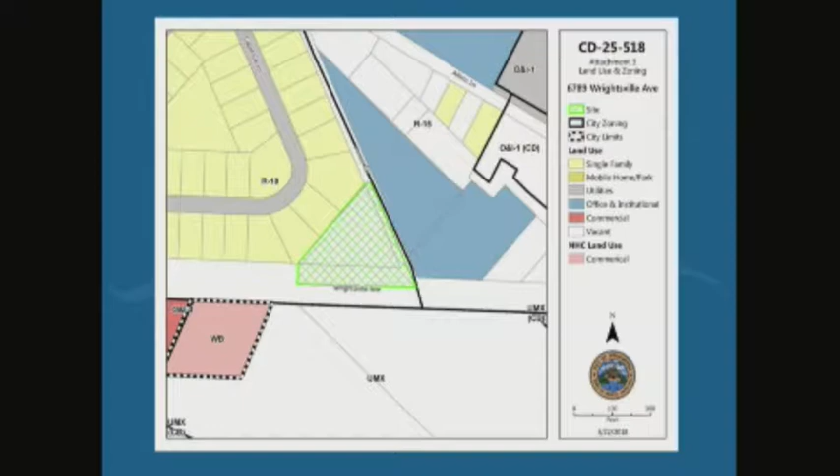To the west and northwest, the property is zoned R10 Residential District and occupied by single-family residences. To the north and northeast is zoned R15 Residential District that is currently occupied by a religious institution. South of the subject property is zoned UMX. On this slide here, you can see the site and the roadways that intersect with the property. Jones Road is an existing unimproved city-maintained roadway with approximately 30 feet of right-of-way. The applicant will be required to upgrade this road along the entire frontage of the property to city standards.

Since then, Davenport Engineering was commissioned by the applicant to prepare a traffic analysis as to the potential impact of the driveway on future improvements of Wrightsville Avenue. The analysis indicates that the proposed driveway would not have negative impact on Wrightsville Avenue and Jones Road. The analysis considered both a traffic signal and roundabout at this intersection. While staff does have reservations regarding the driveway access on Wrightsville Avenue, we do not believe that these concerns warrant denial of the driveway at this time. If at some point in the future a redesign of Wrightsville Avenue shall become necessary for the functioning of the regional traffic network, this driveway may need to be modified or removed.

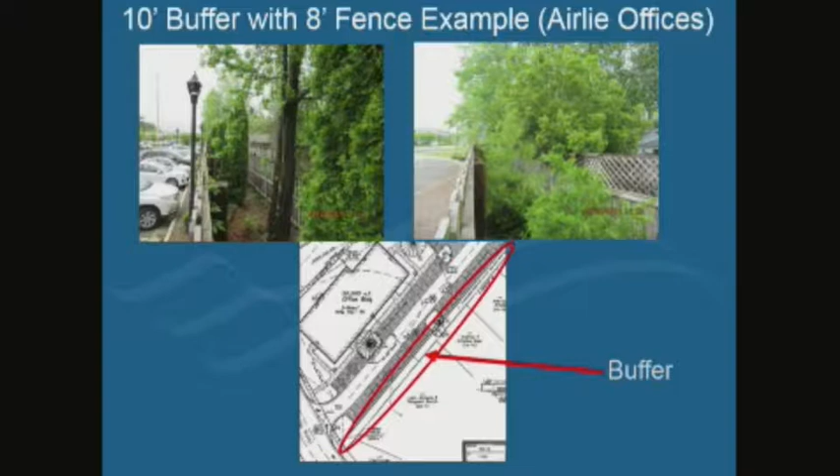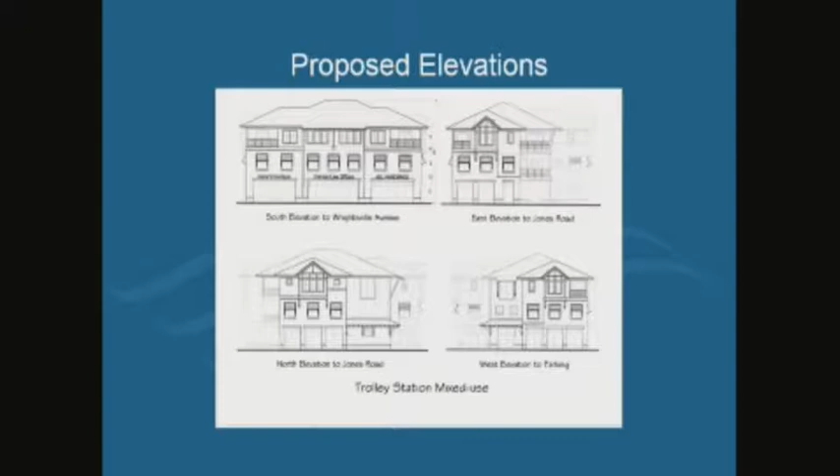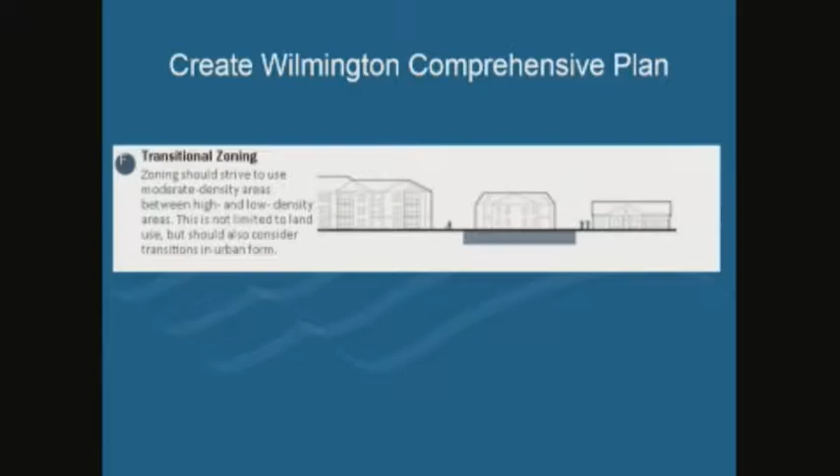As outlined in the Create Wilmington Comprehensive Plan, zoning should strive to use moderate density areas between high and low density areas. This is not limited just to land use, but also shall consider transitions to the urban form. The Wrightsville Sound Small Area Plan, adopted in 2011, identifies this property as recommended to retain single-family zoning or use up to R7. However, as the property fronts both Wrightsville Avenue and Jones Road, staff recognizes that it is unlikely to develop as a single-family residential due to the traffic, light, noise, and planned development along Wrightsville Avenue.

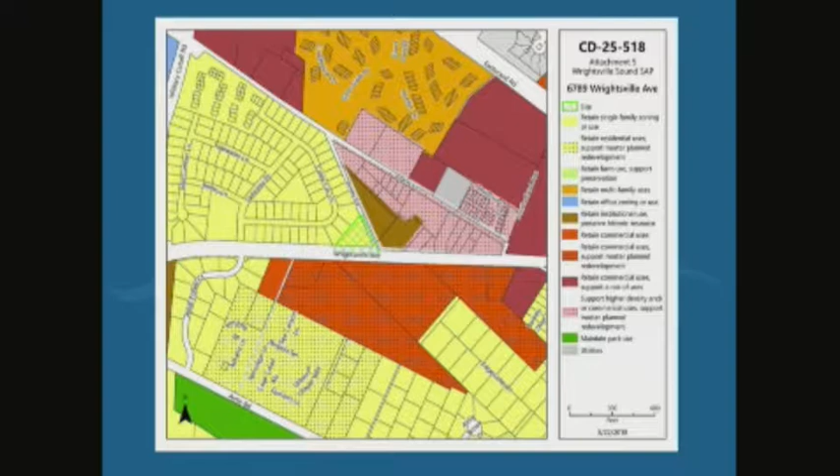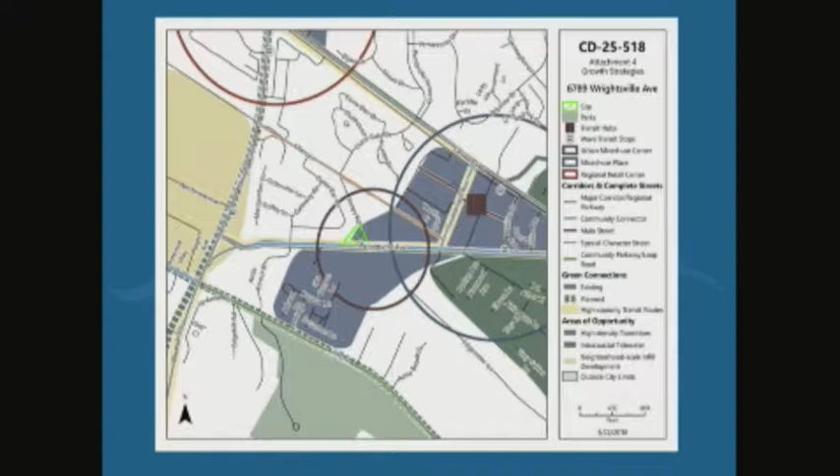The Create Wilmington Comprehensive Plan identifies this area as an urban mixed-use center with an opportunity for high-density transition. The vertically mixed-use structure has a moderate density, providing an appropriate transition from the existing single-family to the west to the future high-density urban mixed-use center to the south and east of the property. The parking in the rear of the building ensures a walkable and active streetscape along Wrightsville Avenue, especially in a high-capacity transit route, and a connection to the Wave bus route on the property.

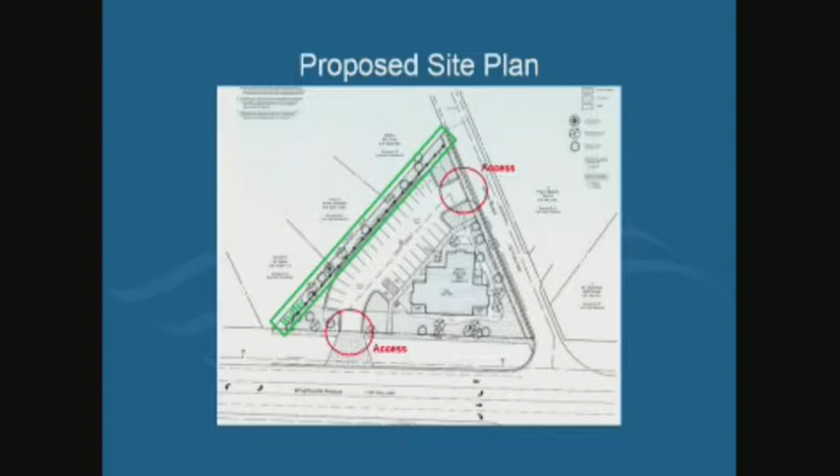The project is designed to have active ground floor and moderate lot coverage while balancing environmental sensitivity as identified in the Watershed Resource Protection designation. Staff believes that this amendment is consistent with the Create Wilmington Plan, the Wrightsville Sound Small Area Plan, and the city's adopted focus areas. On May 2nd, the Planning Commission recommended approval with a 6-1 vote, finding that the plan is reasonable and in the public interest, and recommended approval with the conditions as listed in the case summary. This did include a full 20-foot buffer as number 7 and reduced building height as number 12. Staff and the applicant are available to answer any questions this board may have.

Any questions of staff? Yes, we have a question from Councilmember Barnett. Mr. Barnett. Thank you. My question is about the... what was it? Clifford, could you please turn on your microphone? There we go.

Okay, thanks. My question was in reference to what you said about Wrightsville Avenue, and you said that the staff was really not in favor of what they wanted to do, but at the present time, it doesn't cause a problem. That is correct. There is additional transportation staff here who would like to give input regarding this driveway on Wrightsville Avenue if it's the decision of the council. Okay, so my question, I guess I'm just asking, does it mean then we would wait until another person tries to do something on Wrightsville Avenue to make that change? If roadway improvements warranted a changing of the driveway, that could be a potential consequence in the future. Transportation staff may answer that question better than I, but they have provided that analysis and are happy to speak with this board if necessary.

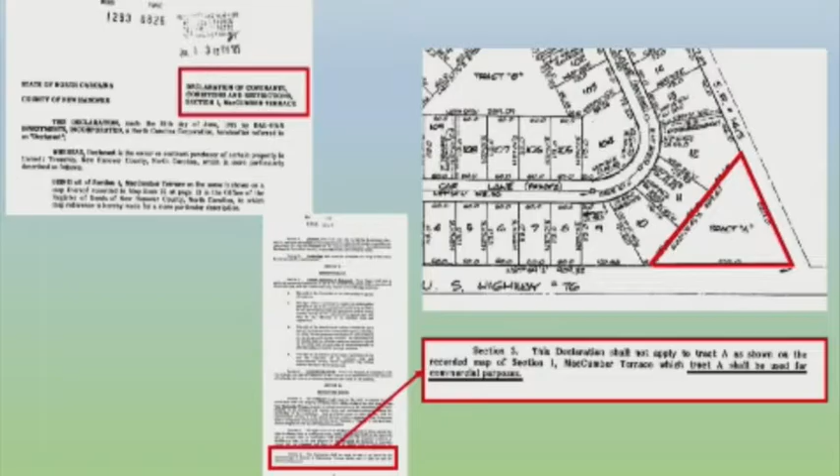Back in 1985, MacCumber Terrace was recorded, earmarking this land as Tract A. The Declaration of Covenants recorded the provision that the intention was that Tract A be used for commercial purposes. So this isn't reaching as far as just taking a residential lot and trying to change it into a commercial site. Anyone that bought in that community or that is aware of the registered documents, this has been earmarked for commercial since day one. As Megan did point out also, the Create Wilmington plan further identified the triangle within its area of opportunity for high-density transition.

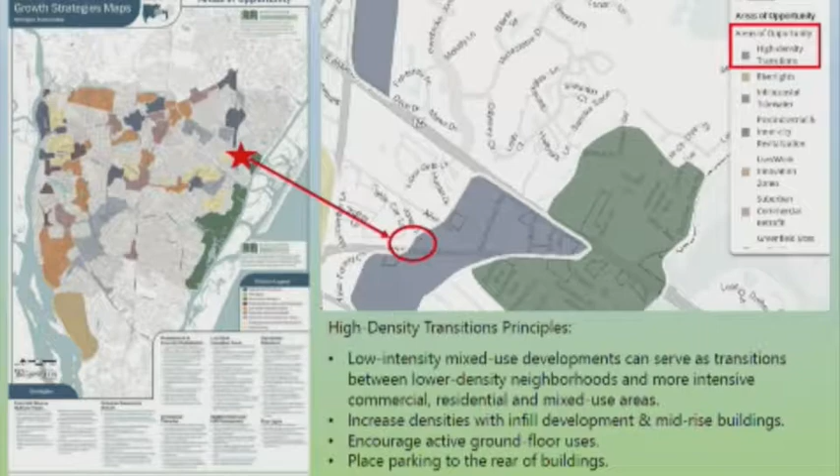So, the plan that we have before you tonight is this one. It is a small commercial district mixed-use development, such as what is proposed as excellent options for infill. They can accommodate low-intensity office, retail, and personal service uses at the edge or periphery of residential areas. They provide convenient locations for businesses that serve day-to-day needs of the surrounding residents. And they also support the strategy of creating residential infill opportunities vertically rather than taking up more land horizontally.

This plan provides the full 20-foot buffer. It has all of the buffer yard that was recommended. It has the parking spaces that are necessary, and it still has the 3-story mixed-use building that is oriented up towards the front. The parking is screened behind as best possible, obviously, with a triangular site, and sidewalks will be constructed along both frontages to facilitate easy access for pedestrians into the project.

We've done preliminary designs on the stormwater management, and we've been working with the church across the street. Part of this proposal will include the paving of Jones Road for the full frontage of our site, along with curb and gutter and sidewalk on one side. The other side we've talked to the church about in hopes of assisting them with some stormwater management problems they've had because Jones Road is an unimproved city street.

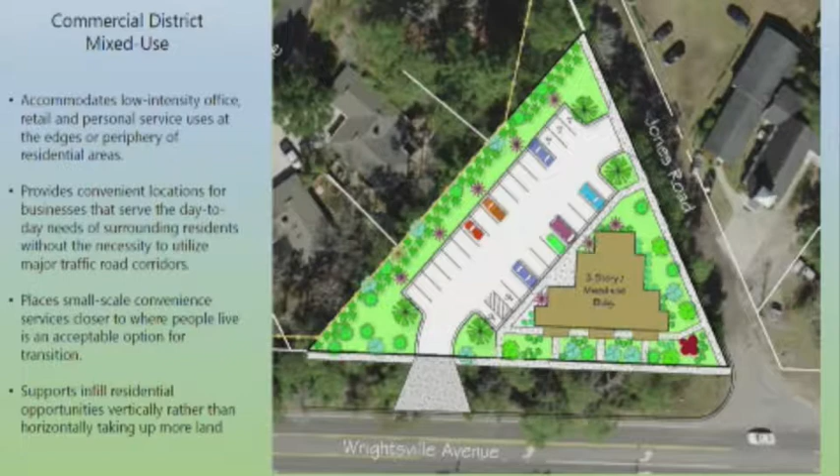So I'll come back to it obviously in my summary, but this is the plan that we're working with. It does have the full 20-foot buffer. The style is a coastal theme, and the architectural features provide a lot of interest on all facades.

As to the elevation, height of buildings in the city of Wilmington that have pitched roofs are measured to the mean of the highest roof pitch. So that would be the elevation that we're talking about here. We have had conversations with the neighbors, and the design of this to make it 3 stories, to make it successful as bottom floor commercial space, middle office space, and then the residential above. We have never been in agreement that that 35-foot limitation is doable.

And so we have worked with the residents next door. I hope that we'll hear something as far as agreement of that, but the agreement has been made that the maximum peak of the roof would not exceed 48 feet. In calculating that down to this mean of the roof pitch, it would be equal to or less than 45 feet. 45 feet is the normal office and institutional district building height limitation. And we would ask that you approve this project without a limitation by what is generally by right. So it could normally be 45.

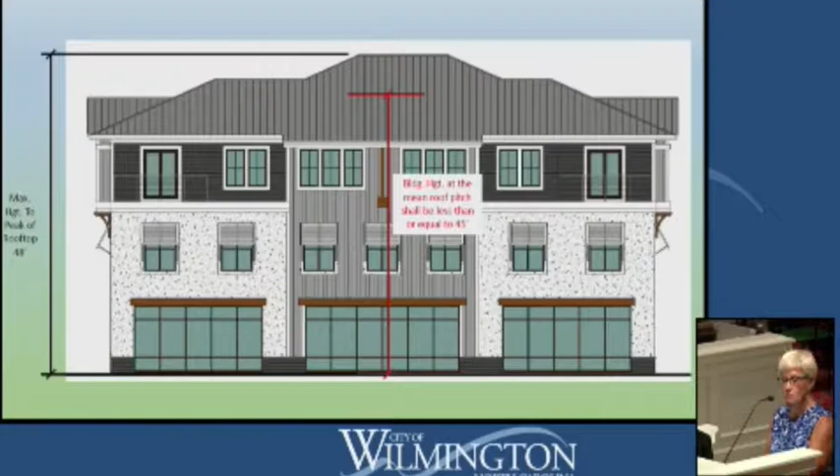When the Planning Commission dictated the 35, I guess they were using the limitation that is in a residential district. But we're requesting this rezoning and would hope that the rezoning would incorporate what is by right in the office and institutional district. We're thrilled to present this project because everyone has worked on it very hard over the period of time, but we'd like to provide some explanation, and a lot of that has to do with this driveway situation.

As is usually the case with a project that requires rezoning approval, we sat down with the Technical Review Committee to have a preliminary discussion about the proposal. I find these meetings, although acknowledging that they are a broad view of a plan without details, an extremely valuable tool for negotiating through the process. The foremost subject to me was the question of access. It is immensely important for a mixed-use project to have adequate circulation, and this site is far too small for providing it internally. So the triangular shape of the site obviously created site constraints for the layout.

With the intention of locating the building to address the intersection and both frontages, the rear parking drive worked out very well to maximize the separation of the curb cuts along both Wrightsville Avenue and Jones Road from the corner. And after no issues were voiced at TRC, our engineer made contact with the Department of Transportation for their preliminary verification of the adequacy of this driveway location. DOT's comments were that it would be restricted to a right-in, right-out movement, but they had no qualms about it accessing the site.

In April, we were contacted by some interested parties about future improvement of Wrightsville Avenue to a complete street and concerns over our driveway location. We contacted both the city MPO and NCDOT for more information. Although it's my understanding that there is not currently a funded project, we wholeheartedly support it. But we got our traffic engineer involved to review the plan and determine that the driveway's distance from the intersection would present no adverse effect on future improvements to Wrightsville Avenue.

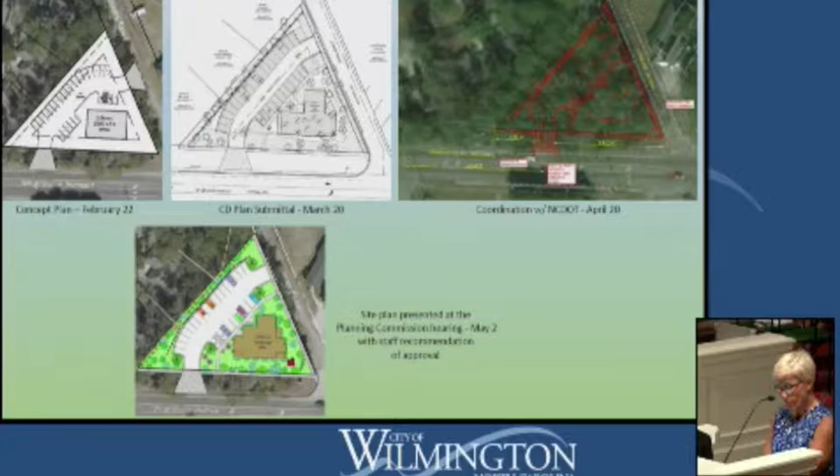The plan presented to the Planning Commission and all along for their positive recommendation has included the dual driveways. So after the meeting, the discussion intensified over these driveways, and we've been working diligently with staff and traffic professionals since then to satisfy concerns. We all know that redevelopment of the former Galleria commercial site is imminent. It is a large site that will have extensive urban mixed use. It is our understanding they have recently submitted a scoping request for a traffic impact analysis.

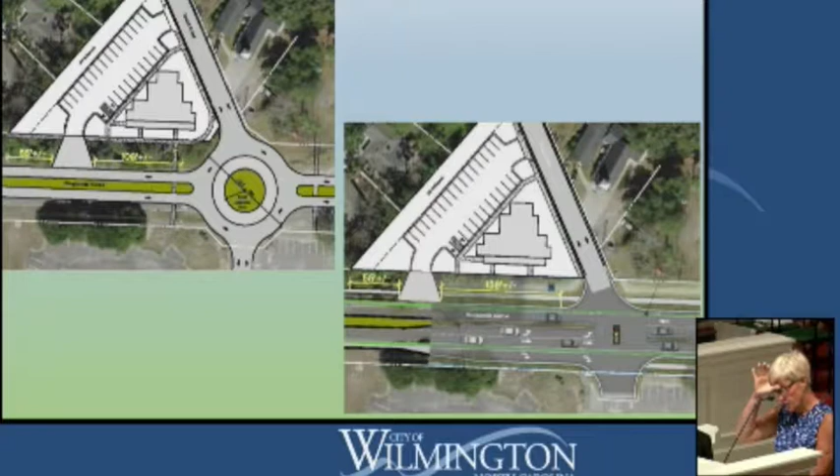The trips in and out of our project are obviously minimal as compared to what that development will generate, and the primary access to the project would appear to be from that intersection of Jones Road and Wrightsville Avenue. So we have gone about working again with the professionals and the staff, and two scenarios have been discussed, a roundabout and a traffic signal. These are exhibits of how each of them would operate, and our traffic engineer has run preliminary models based on fairly conservative estimates on volume and distribution dictated by the Department of Transportation. I believe these results have been provided to you by Mr. Moten.

The cross-section of the proposed complete street of Wrightsville Avenue will not be affected by our driveway, no matter whether it consists of a 2-lane divided road, a 4-lane divided road, a 1-lane roundabout, a 2-lane roundabout, or a signalized intersection, in his professional opinion. The trolley station right-in, right-out access is limited. It is downstream to the west of the intersection of Wrightsville Avenue and Jones Road, which is considered the departure side of the intersection, not the approach side.

It's the approach side that is much more important to the functionality of an intersection because it controls lane storage, deceleration, reaction time. The Department of Transportation, from what I understand, usually promotes at least a 50-foot to 100-foot driveway clearance to any intersection. And you can see on this that our driveway is in excess of 100 feet in both scenarios.

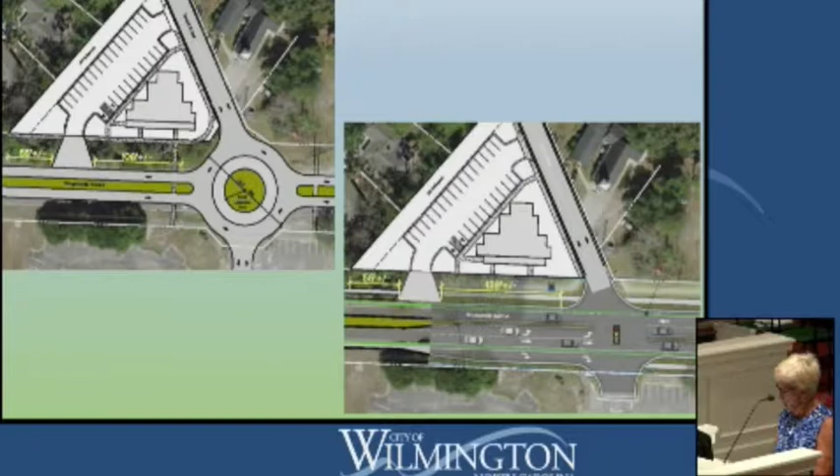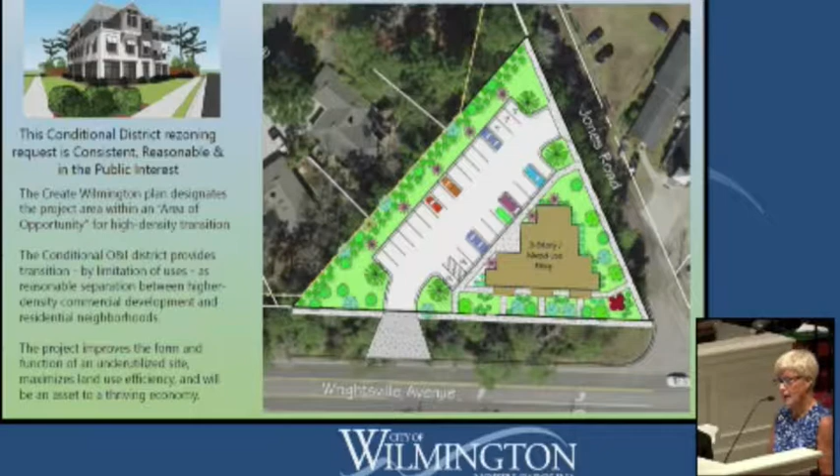With that, I would just like to complete my presentation. We respectfully ask for your approval of this conditional zoning district petition with the normal 45-foot height limitation based on office and institutional zoning criteria, because it is consistent, reasonable, and in the public interest. The comprehensive plan supports the area for high-density transition, and the project improves the form and function of an underutilized site. It maximizes land use efficiency, and it will be an asset to the community. Thank you. Okay, Ms. Anderson has a question.

Cindy, on your rendering here, it shows a fence. Is that fence existing? Yes, there is a fence around the entire Macomber Terrace community. So that is not our fence, that's their fence. But we have a 20-foot buffer between that fence and the first parking. Mr. Burnett?

You made a statement when you first came up that the staff didn't have the up-to-date material. Just this plan. The staff's plan still showed the 10-foot fenced buffer. That was the only thing that was really any different. Is there any reason why they didn't have it? It has been a dynamic project. We were working with different scenarios of building height and different types of fences and buffers, but this is what we're proposing. This is more in agreement with the neighborhood, certainly what the staff requested and what the planning commission recommended. And you have talked with the churches right in that area?

Yes, most of the conversation with the church has been over Jones Road, some drainage issues that they have, which paving of Jones Road will, I believe, improve. Thank you. Mr. Grady? Hi. Hello.

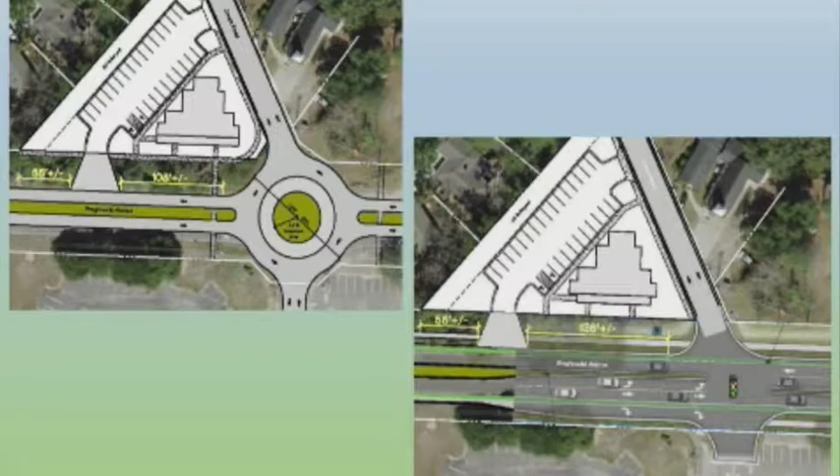So what would the impact be of having a bus stop, a pull-off, somewhere in that 108-foot area? I think that maybe some of your traffic staff can better respond to that, but I think that could be provided without impact. Because frankly, with the traffic circle, that sidewalk crossing, I assume that was put in by your design for tonight? That little concrete crossing across Wrightsville Avenue? Yes. And that makes sense to connect a building that way. But I'm concerned about how we're going to fit a bus stop in there.

Well, basically, it sounds like what you're saying is provide some pavement. It could be used for a right turn lane for those that are turning into the right in, right out. But it also could be used for a bus when a bus needs to use that additional pavement. So you think one would fit there and still leave room for a sidewalk to cross? Yes. Thank you. So I just heard you say that the right-turn lane could also be used as a bus stop? I said some additional pavement could be used for both.

We would agree to put in the bus stop just past the driveway. There is 58 feet here, and we could easily create an extra lane, and we're willing to do that as a condition. The bus stop would move 50 to 60 feet, but there is adequate right-of-way along there, and we could put a bus stop turn-off, but I think it would be best located past our driveway, not before the driveway, simply because of any turning movements that would eventually occur, whether it be a signal or roundabout.

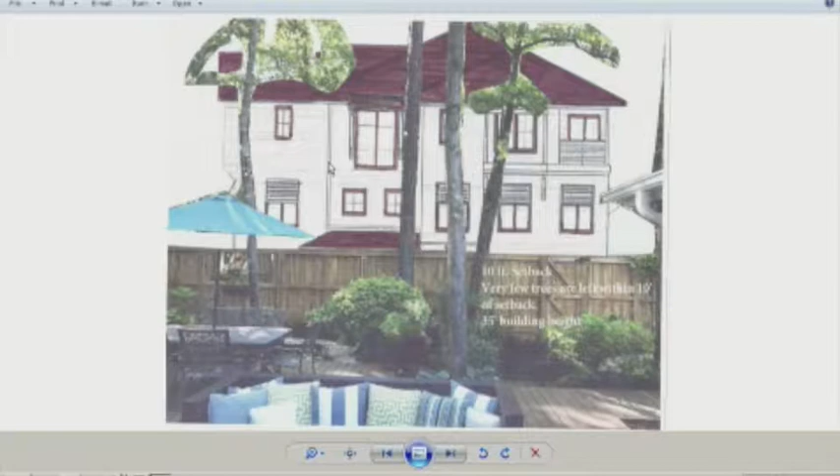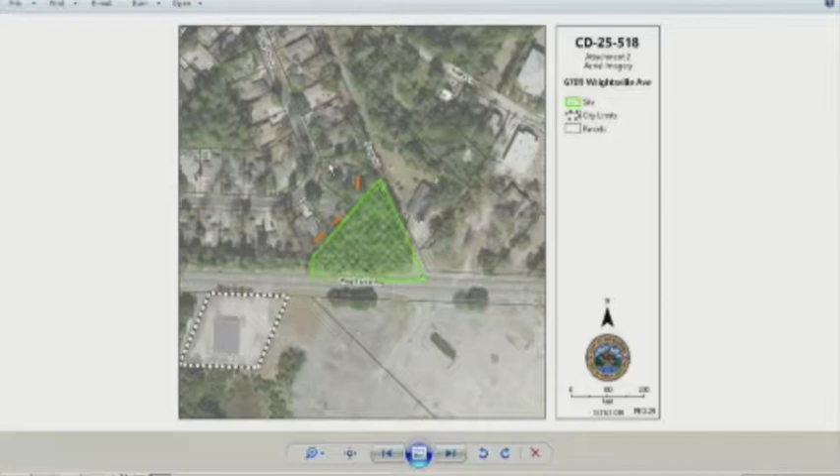The next photo is the triangle, and the red marks indicate actually how close the back of our homes are to the property line. So our fence line runs about 20 feet to the back of our homes. The next photo basically shows the 10-foot that you've already seen in our property lines. Macomber Terrace, this is just a triangle portion of Macomber Terrace. If you look at the tax record, it still says it's part of Macomber Terrace.

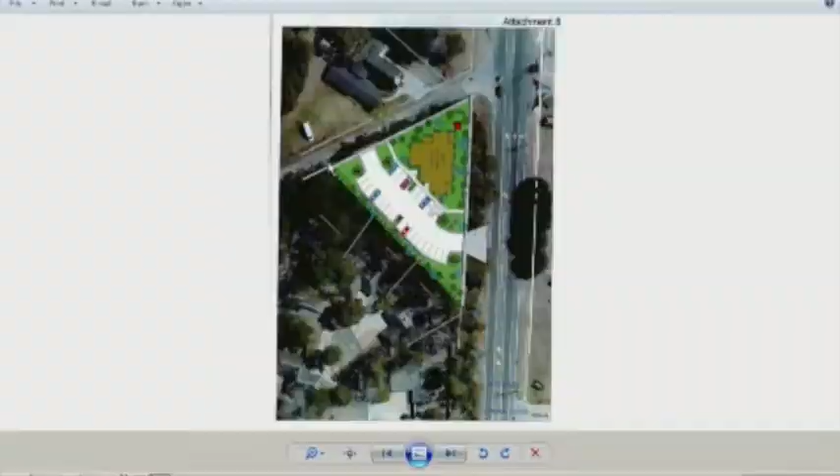I feel like we talked a lot about the streets tonight, and the entrance and the exit, having the two, one entering on Wrightsville Avenue. I can tell you that in Macomber Terrace, we do have an in and out entrance. One goes in, one goes out. We had so much cut-through traffic during that time, we had to close off one of the ends of the community. So I would be concerned about that on this position. And the light at Military Cutoff, literally the cars are backed up from Military Cutoff all the way to Harris Teeter. So when I look at that roundabout, I'm thinking, where do all the cars go when the light turns red and they hit that roundabout?

So that's pretty much why the 20-foot buffer zone was really big for us. And like I said, that was the first time we've seen that tonight. So we're happy about that. Thank you.

Good evening. Greg Jones and my wife Jan Jones. We live beside the Sheffields, so we live directly in the path of this new building. As Carol has said both times before, we're not opposed to the building. We have not been opposed to the building. We met with the developer and said, look, we have no problem with you building the building, just give us a little bit of privacy. And the 35-foot height is what your zoning board said to do, which we said that's great, we approve it, and the 20-foot setback, which are the two things we asked for, because as you saw in Carol's pictures, if you look at Lumina Station, that is 35 feet to the gutters.

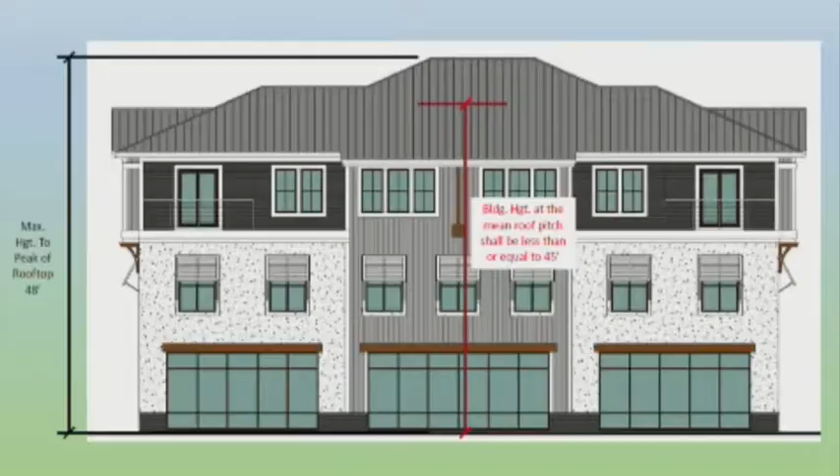I guess my question's actually for staff. The opacity that we talked about, what was the terminology, 100% opaque or something along those lines? Is that standing on the ground? How do we define that from a height standpoint? Sure, the planted buffer needs to be opaque from a ground height to 6 feet, and that has to be within 3 years of planting.

So the illustration that I believe the lady gave us, it's pretty cool, with the see-through, if you will, and I'm sure it's not 100% accurate, but it does give you a good idea of what we're talking about. They'd be required to kind of fill those gaps with evergreens or something up to 6 feet tall. Is that accurate? That's correct, but she did have a fence on the rear of her property, and I don't know if that was 6 feet or 8 feet in height. The vegetation would be supplemented on the property for rezoning tonight.

So her fence, they can use her fence for opacity? She's looking at her fence, then they would put the buffer. I'm just asking if they're going to have opacity from their property up to 6 feet. Is that the question? That's correct. Okay, thank you.

Mr. Dunbar? Cindy, would you put the drawing back up that shows the elevation facing Macomber? Okay, so that would be the bottom left view. Okay, just to follow up on what Clifford was asking, those windows, how tall are those windows? I would imagine 3 to 4 feet of window. They're set at a 6'8" window height. I'm sorry, I didn't ask it clear. How high up are they?

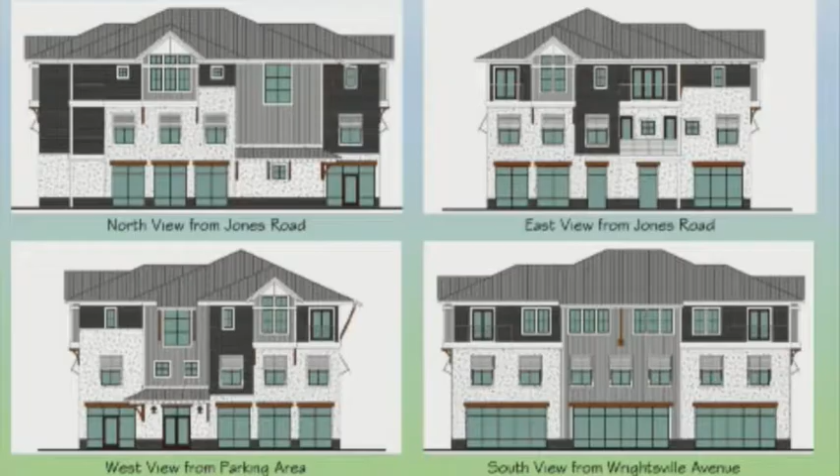Any other questions? Okay. You guys ready to vote? I'd like for Don Bennett to come up, our transportation guy. Mr. Bennett?